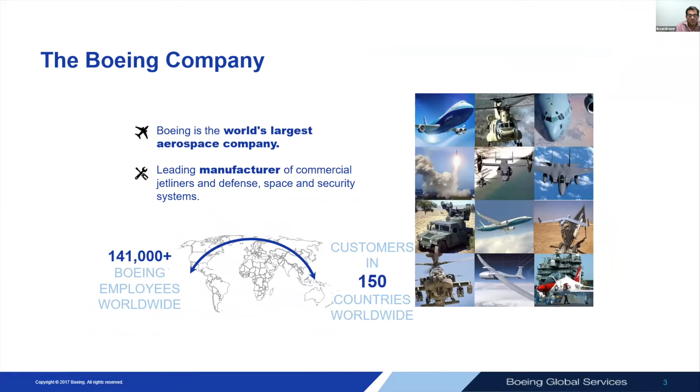Anywhere in the world, you're going to find Boeing is going to be there in some capability. Primarily, Boeing is broken up into three companies: your commercial airplanes, your military defense, space and security, and then global services, which is what I'm part of, which is kind of your service-oriented business of how to keep the products working, and to repair and maintain. And then there's a very tiny group, Boeing Capital Corporation, which is real estate, but a very small part of the business.

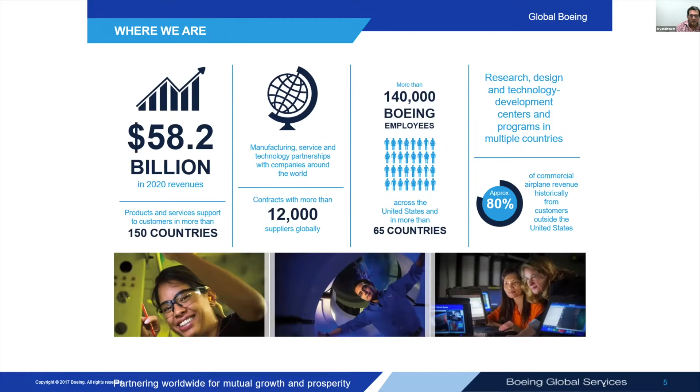So we're a lot of people, about 140,000, which is down. We've been a lot higher in the past, but we are an engineering company. So if there's an engineering field you're interested in, I guarantee that there is that opportunity somewhere in Boeing. We are an engineering company, and all engineering is represented here at the company.

So I want to get into San Antonio, where we are specifically. We do MRO, so maintenance, repair, overhaul. We started off in the late 90s with C-17, doing repair and maintenance to keep that fleet viable and to keep them supporting our troops.

Our site is pretty big, we have 1.6 million square feet. We actually just upped that about another 30% with another hangar that we've taken over, and that happened in the past month or two. But pretty big site.

We are growing. Within the next 18 months, we're going to have 8, maybe 9 different platforms that will be on site between the executive fleet, B-52s, F-18, F-15, C-17. We're going to have a lot of programs here, and we are growing quite a bit.

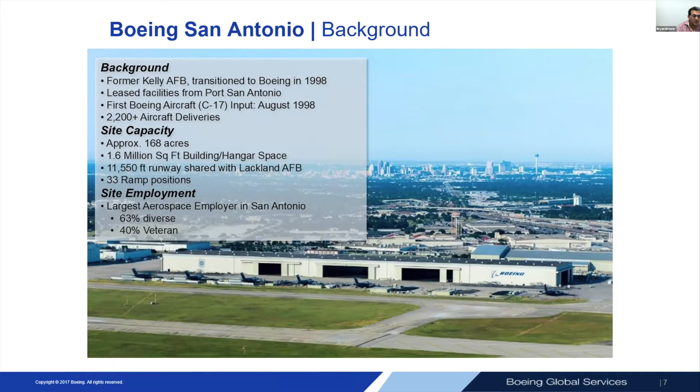Big part of what we do, as I was saying, is how to repair these aircraft, which is very different from production. It's going in and either doing a modification to improve the performance of the fleet, or a lot of times going in and going, well, that's broken, how are we going to fix that? Which can be a big challenge, but it's a lot of fun also, because it's always kind of a new problem that comes in for us here.

So a little bit about the San Antonio site where I am now. Most of my time I've had with Boeing has been, again, with hypersonics. And so I'll go into just a little bit of the background of composites.

Most people think of Boeing composites as 777X wing CFRP, carbon fiber reinforced plastic. So these giant wing structures, and you have these machines that are just trying to lay down material as fast as possible, or like on the 787 barrel, you have your winding tape around a giant mandrel so that you can make a fuselage. That's most of what Boeing does as far as composites.

But where my world is, and something a little different that I think is more interesting to talk about, is composites like the heat shield, where you have an ablator-filled honeycomb to protect the Starliner, and very similar on Dragon that SpaceX has, and it works well. It's kind of similar to also what Apollo had, but an ablator-filled honeycomb, still a composite type of setup.

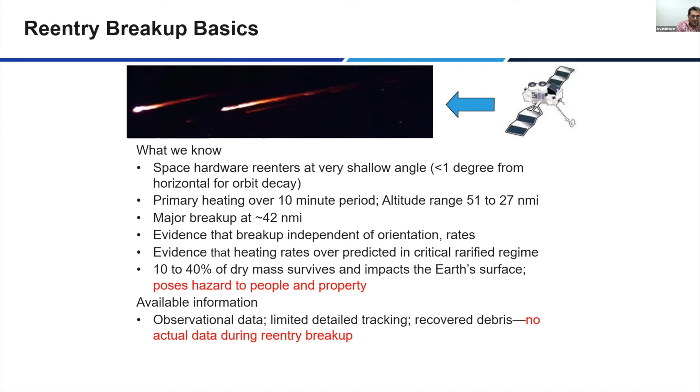Question about temperature sensors—I'll get to that. They're called thermocouples, made of two dissimilar metals welded together, and they are embedded into the thermal protection system. We'll see that here in a second.

So as the reentry comes across, when it's uncontrolled, your footprint on where all this stuff could land is all over the place because you don't have it controlled. That's where we're trying to get better data, because we don't want pieces of something big re-entering, possibly coming down over populated areas. We want to better make sure that it's all going to burn up or land in the ocean.

That REBR, the reentry breakup recorder, is part of that trash truck, and it just goes along for the ride. We'll talk about how it pops out and re-enters, making a phone call basically as it's falling down through the atmosphere—transmitting to the satellites above all the data it's captured and is still capturing on the way down.

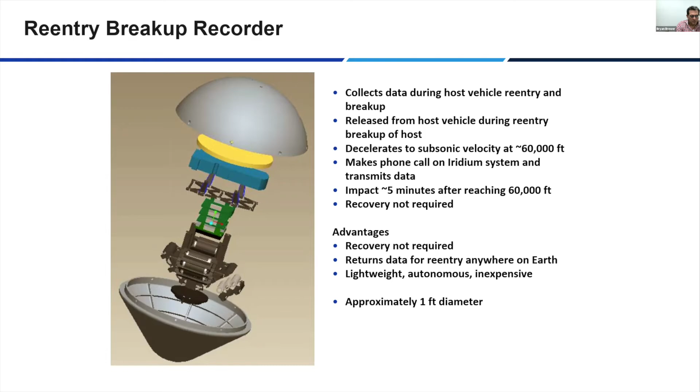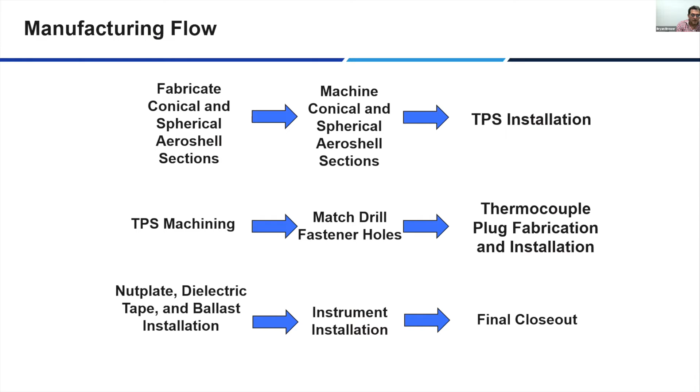High level flow of what we need to do to manufacture it: we need to fabricate the back shell and the forward shells. We then machine those, install the TPS, machine the TPS, and then figure out how to install your electrical equipment and antennas. You have to figure out how you're going to attach to the structure you've created. Then there's instrumentation, thermocouples measuring temperatures in these environments, installing that, final nut plates for attaching equipment, and then we start closing it out. We'll get into that example now.

So the back shell was a standard layup, pretty easy. It's radio frequency transparent—we have to be able to transmit a signal. As we come down through the atmosphere, we've got to transmit a signal back behind. So this was just a standard layup, not too difficult.

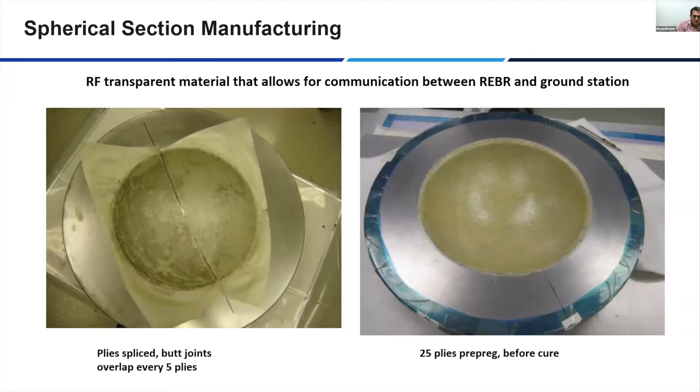We just had a female mold, and it was hand laid up to make a pretty easy part to cure. It was about 25 plies. You lay down one ply—this is called a 0-90 fabric, so fibers running in the 0 and 90 directions, and then we rotate around the clock orientation to give us what's called a quasi-isotropic layup. This gives it strength, because composites can generally only give you strength in one direction, so you orient your fibers to get better strength. Pretty easy, simple piece to lay up.

That's the back shell. The forward shell was a little more complicated, because we had to build a shelf—something we could attach everything to. So that's what you see on the left, how do you make that shelf?

Normally, if you start laying up around it and put it all into your autoclave and cure it, it gets hard and you'd be die-locked—you wouldn't be able to get your mandrel out. You'd have to make almost like a Jenga-type metal mandrel, which would be very expensive to make, to be able to pull out the mandrel.

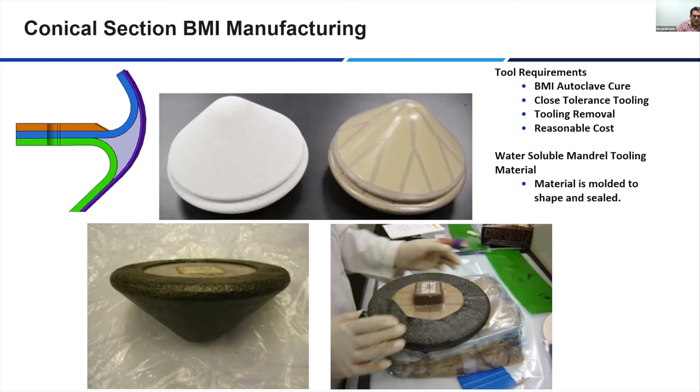So what we ended up using is a washable mandrel to lay up on, which is basically sand with a binder in it. It's hard, so we can lay up against it, then put it in our autoclave to cure it. When we're done curing, we just make a hole in the tape and wash it out with water. That was a very low cost way to have tooling, because tooling is often very expensive on a project, but we're trying to keep it fairly low cost. So that's how we got around having an expensive tool—a washout mandrel. That's how we fabricated the bottom half, the pointy end going into the atmosphere.

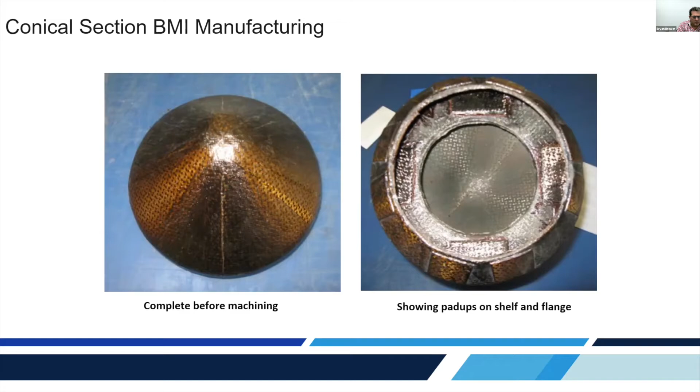This particular material is called BMI, bismaleimide. You have carbon fiber in there, but the resin part is the bismaleimide—a higher temperature type of resin. This one's really challenging to fabricate, because as you get hot, your resin gets to a real low viscosity and wants to squeeze out everywhere. So that's our forward shell, and it's pretty rough.

Now we need to go machine it to start getting the holes in. So we machine, and we have holes—when machining composites, you don't cut as much as you grind, because grinding gives you a good surface finish. When you cut, those little fibers in the composite often fray up on you and won't give you a nice clean edge to work to. So we fabricated the structure, now we're machining it and putting our attach points in it so we can start looking at how we attach the instrumentation.

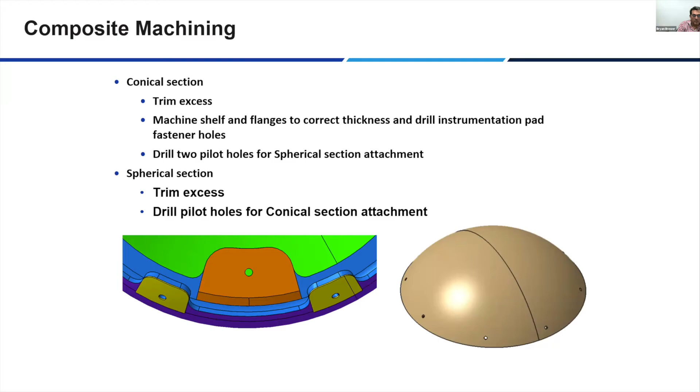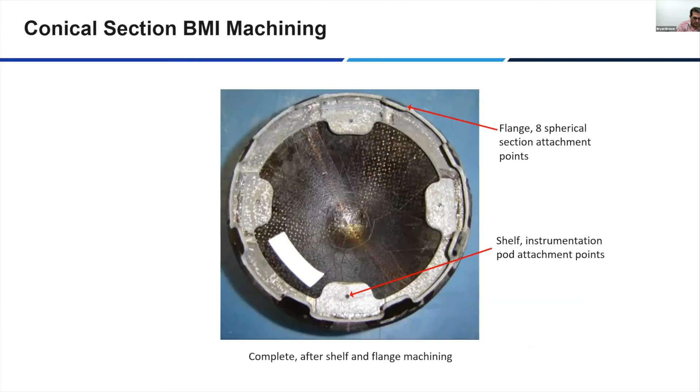After we've got that machined, we need the TPS that comes on after that, so we can see the flat spots and be ready to attach equipment. But before we attach the equipment, we have the TPS. This was the critical part—again, it's getting really hot, so how do we keep it cool? We line the outside of the leading edge, bond on a honeycomb, and then we need to fill all those individual cells of the honeycomb.

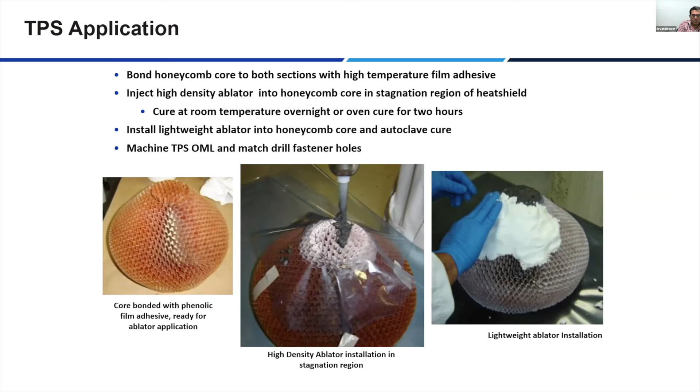Back in the Apollo days, when they were going to the moon, they filled each honeycomb cell individually by sticking a nozzle down in and filling each one. It was very time intensive. So what we worked on here was we filled just the couple in the front with a high density ablative material, but then on the rest of it, we just hand packed it on the outside. We wrapped it in a vacuum bag, and then used the autoclave pressure to press it all in. So now we're not having to go fill each individual one, but we can have an autoclave do that work for us, getting all the cells filled at one time without having to go one by one. So we've got our TPS in our honeycomb, and they machine it.

So we then start installing the thermocouples, the TC plugs. This is how we measure the temperature: we have a wire that goes across at a certain height or thickness, and that wire will give you a difference in electrical charge between the two dissimilar metals. That difference in charge can then be equated to a temperature, which gets fed into a reader that tells you what the temperature is. That's how we measure the temperature on the outside. We have thermocouples on the inside also, but that's how we measure those extreme temperatures, like 3,500 degrees. You have metals that can take those temperatures, and that's how we measure those.

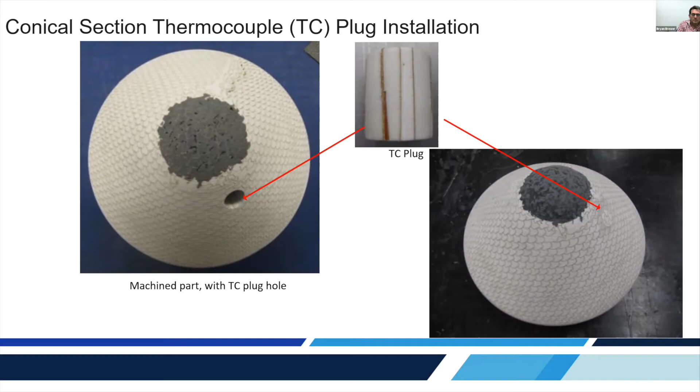So we have our TPS, same with the back shell. We did the pushing in of the ablative on the back shell the same way.

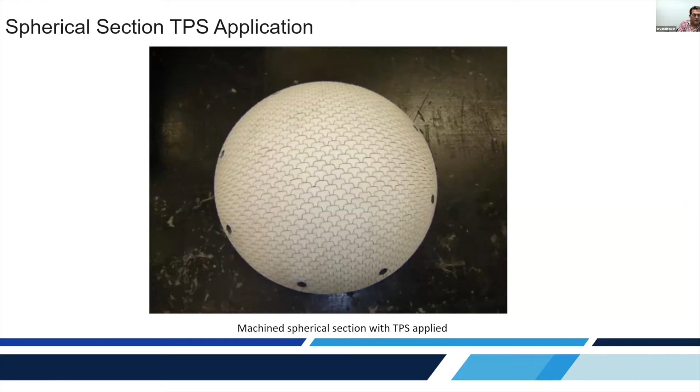Now we're looking at installing the support equipment. But how do you do that? A lot of times you have things like nut plates, and a lot of times those are fastened in with a rivet. But we didn't want to drill more holes in our structure, and we were looking for lower cost options. Since this is a one-time use, we glued them on. We used a high temperature adhesive with really good strength, more than we needed, up to 350, which is more than enough.

As we start wanting to install these things, you have a problem with composites and metals: they can't come in contact with one another for long durations, because you'll get a battery type situation which will start corrosion between composites and metals. So anywhere you're going to have metals and composite touching, you've got to put down something like dielectric tape or fiberglass to act as a boundary layer between those two. That's what we start doing next, before we put any of the instrumentation in - we get those nut plates and dielectric materials put in.

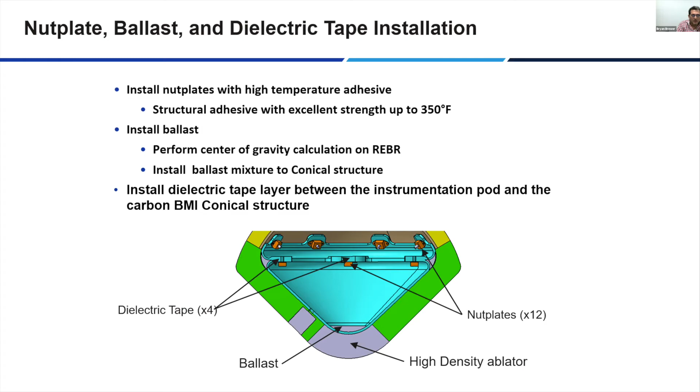Then we also have to think about the aerodynamics of the vehicle, since this vehicle is self-righting. It doesn't have any control surfaces - it just controls itself through shape. So we have to add ballast, and we add tungsten to the nose of the vehicle to help give it a heavy point to help it go into the wind. Again, no control - it's just popping out as the vehicle destroys itself in reentry, it pops out on its own.

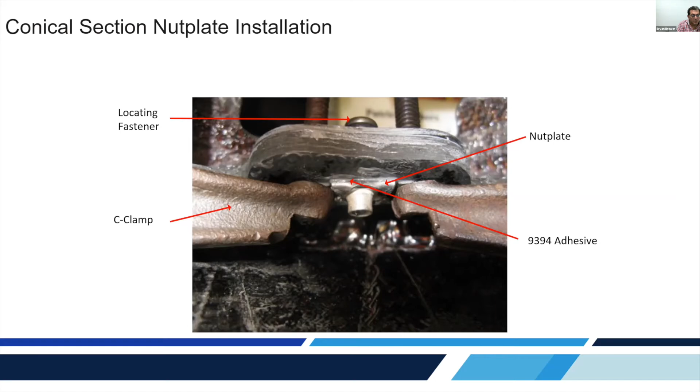Again, you can kind of see these nut plates, because you've got to be able to screw down onto your structure, and with composites, you never really tap a composite like you do with metals. So you've got to put down something that you can screw down onto - again, nut plates, and we used adhesive to be able to hold it down in place, trying again for lower cost type options.

So we've got our TPS, we've got our thermocouple wires coming through, and we're ready to start loading in equipment to it. We can see the ballast that we added, that we talked about, to give it a heavy nose. And we do the final closeouts with the material.

Again, you can see it's a small area inside there, and that's just regular electronics. It's not too much different than your cell phone. But the outside of this vehicle is going to be well over 2,000 degrees, and so you can see how thick the thermal protection is there to protect it, because you can't put your cell phone up to 2,000 degrees.

It starts saying it's going to shut down if you leave it in the sun and it gets up to like 100 or something. So you can see just how thick that back edge, the thermal protection, is. You can see the leading edge, the gray and the green, are a lot thicker than the yellow, because you have much higher heating on the leading edges of your materials.

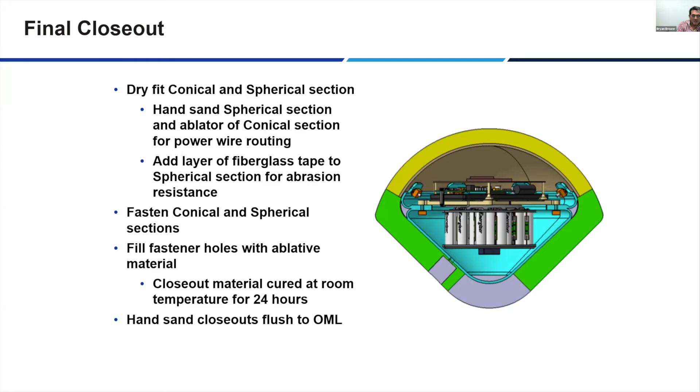And so we install our equipment. We then bolt the top half and the bottom half together, and then we fill in the holes with more ablative material, let it cure, and give it a little bit of a sand to give it a smooth surface. And we end up, as you can see on the right there, a finished vehicle.

With hypersonics and reentry vehicles, you can't have any gaps. Any gaps in the surface, you get hot gases that will enter your structure and just destroy it. Those hot gases will cause your structure to fail very quickly. So making sure you don't have any gaps in your vehicle is very critical for a successful flight. And so we have our finished vehicle there on the right.

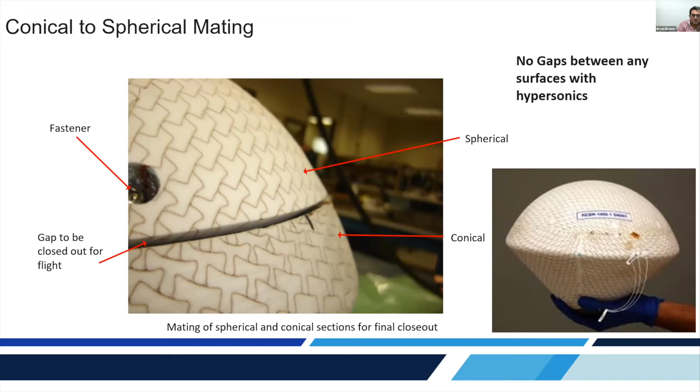And so now it's time to go to the space station. You can see it's inside that copper housing. They've unloaded the new supplies, and they've loaded supplies back in. And that copper housing, the idea behind that is that you have copper, which is a very conductive, low melting metal, so that it would heat and melt and release the vehicle very quickly and easily.

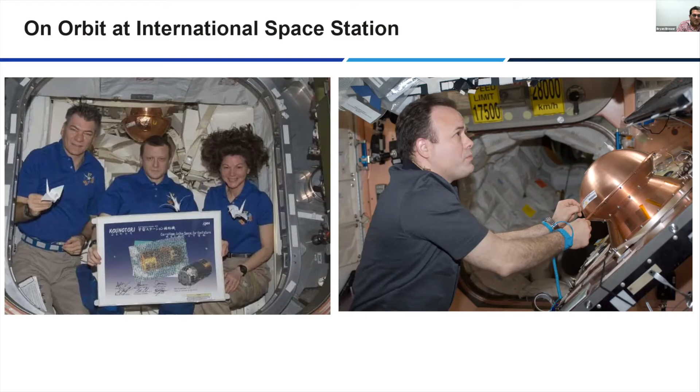And we had success. We got data. It made the phone call and sent back the data that we got there of what were the Gs, what was the temperature, and at what altitudes did you get those pressures.

We also had some failures where we think one of the fuel tanks exploded during reentry, and we were mounted right on top of the fuel tank. We didn't survive that one. We think it blew us apart and destroyed the vehicle before we got any data from lower altitudes.

So we have had those failures, but that's part of the reason why we made them low cost - we can just keep putting them in and gathering data when we have the return vehicles that come and break up.

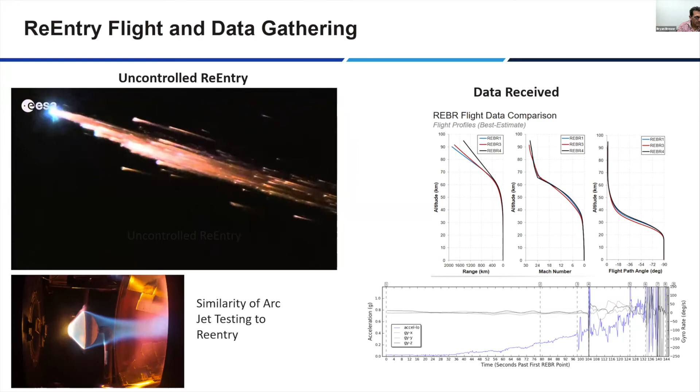But we have had other vehicles that survived the impact into the ocean, and they just floated on the ocean and sent their data back. I think it was for about 32 hours it sent the data back. It just keeps making the same phone call over and over, sending the data and what it's seeing.

And so we have had some successes, and we had some interesting ones where it definitely was a very intense heating environment, being a fire on the pad. But the vehicle pretty much survived. It obviously got charred up with that.

Any questions? I know there's one about what are the typical research opportunities on this subject.

So we do a lot of this development research to develop these types of materials at Boeing. We do a lot of times work with universities to get some of the testing done, but we do a lot of it internally with what we develop. I have a few patents now on these materials that we developed, and then Boeing patents them so that we can use them in our products.

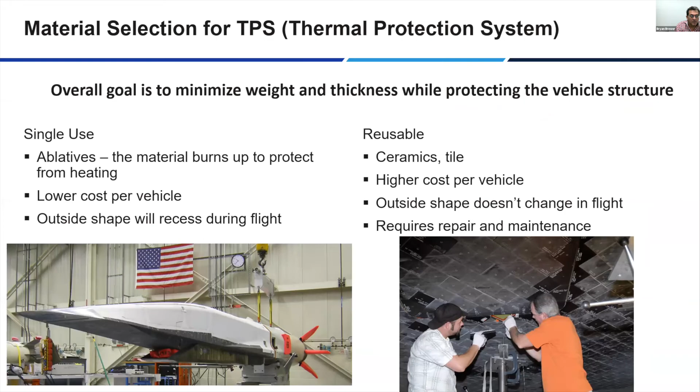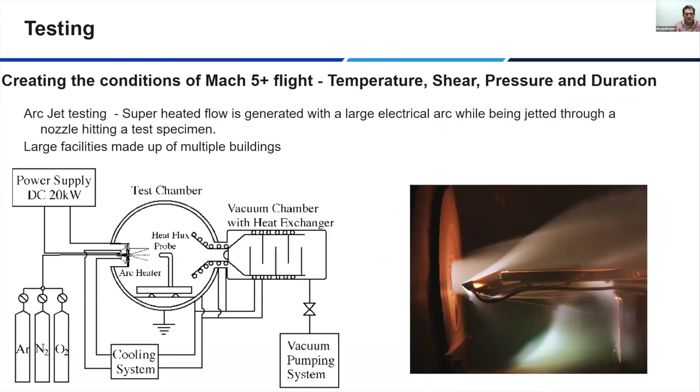I do not do as much, but Boeing does definitely. We definitely had, like on X-51, a lot of things that were composite but ended up having to turn into metal. On the leading edges of X-51—maybe you can see my mouse—these were originally composite, what's called carbon-carbon, and they didn't do well in some of our testing, so we had to switch it over to metal.

I think it had to end up being something like columbium, a very high temperature metal, very expensive. But still, most of our planes here at Boeing are metal. With launch vehicles, we've done a lot of work with aluminum lithium, trying to get the weight out. But there's still a lot of metal development—my world has been more focused on non-metals, but Boeing still does a lot of development with metals, and also welding and joining metals, because you still have a lot of metal.

Even with new planes, it's hard to beat metal. Like the 777X—we talked about it having a composite wing, but trade studies showed aluminum was still a better fuselage option, so they're still going with a metal fuselage. Still, lots of development with metals—I just haven't done as much of that.

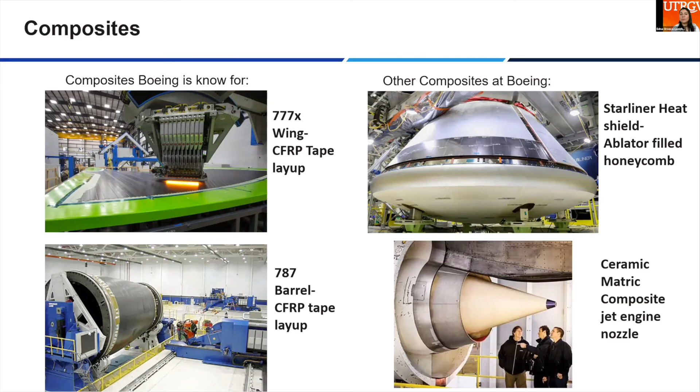I have a question. A lot of the times our students ask if it's necessary to go into the aerospace engineering field to work at Boeing, for example. What advice would you give them if they're in mechanical, electrical, or manufacturing engineering?

So I was a mechanical engineer in school, and our school didn't quite have a materials engineering program at the time. But really, any of the engineering fields is what you need to be an engineer. It teaches you more about how to learn as opposed to the specifics of the engineering. We have lots of people that started off with electrical engineering degrees who are doing structural work now with the vehicles. So it's more about learning those basic processes and principles, and once you start working in aerospace, it's less about what you specifically studied.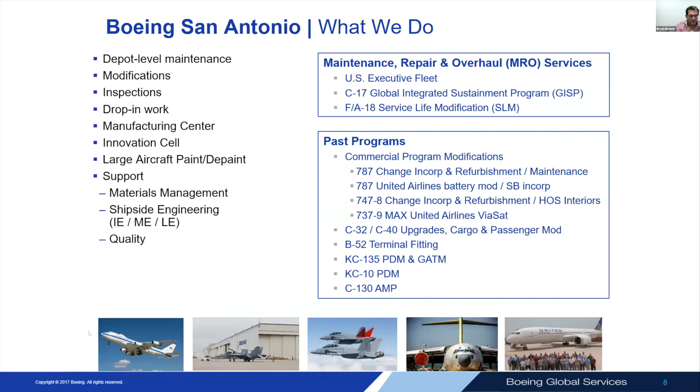There's a question on why we had to stop using carbon-carbon composites. It couldn't survive the environment—the aero loads on it were causing it to break. Without going too long into it, the carbon-carbon wasn't surviving the aero loads, so we had to switch to a metal that had basically better toughness.

A lot of times your non-metals don't have as good toughness. They have good strength and can take high heat, but if you hit it with a dynamic force, you really need that toughness. That's why we had to switch to a metal, to handle those dynamic loads. It's not just a gentle leisurely flight when you're going Mach 5 or Mach 6, like cruising in a commercial airliner—it's much more jarring, and those aero loads, kind of like turbulence when going that fast, hit a lot harder. With the stresses on that inlet, it couldn't take it, so we had to go to a more durable material. Hopefully that answers your question, Brandon.

Any more questions, guys? No? All right, well thank you everybody for the opportunity.